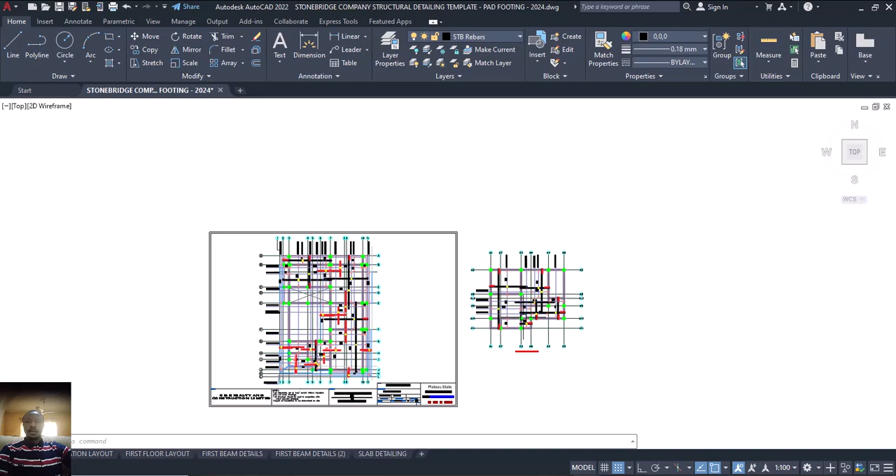If you remember, last time in our part 1, we did a slab detailing for this part, whereby we did the bottom reinforcement, as you can see here. Last time we were able to complete the bottom reinforcement for this. So this time around, we want to look at the top reinforcement for this particular slab.

Don't forget, what we are dealing with is this structure. We are on this level. And since they are typical, it means that whatever we are able to achieve at this point is the same thing that we can also use at this point, since they are the same. They are typical.

So the software we used last time is called Stonebridge Detailing Template. This is the software that is advisable that as a structural engineer you should be using. Now, if you look at this place, we explained it last time. In case you have not watched how we came about this, you should go and watch part 1 of this.

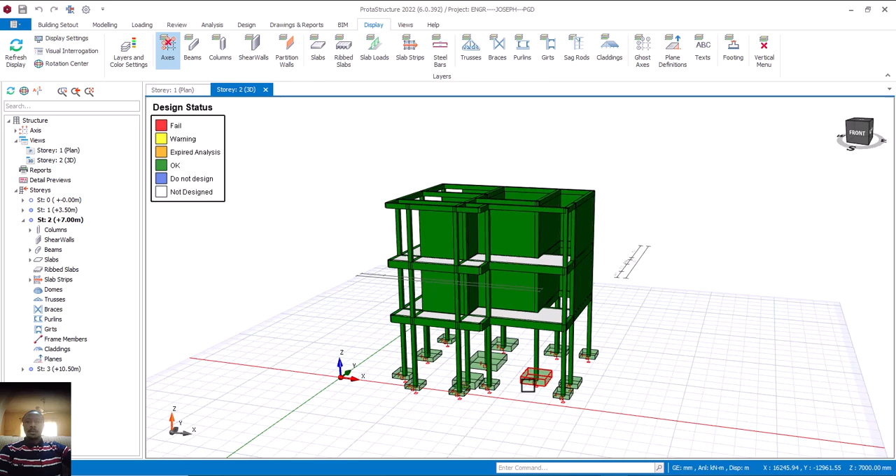So now, how do you know which one to click? Which one to click here depends on the kind of foundation you use for your structure. And looking at this structure, you can see that it's on pad, isn't it? So let's go straight to the point. Once you get to this place, what you need to do is click on pad, since your structure is on pad. Once you click on pad, it brings up this for you.

And we are going to be using this as our example. The example given to us here is what we have used. You can see some samples, the work done up here. It was this one that was used to detail this structure here, as you can see. All right, so let's now proceed to today's training, which is the top reinforcement for this.

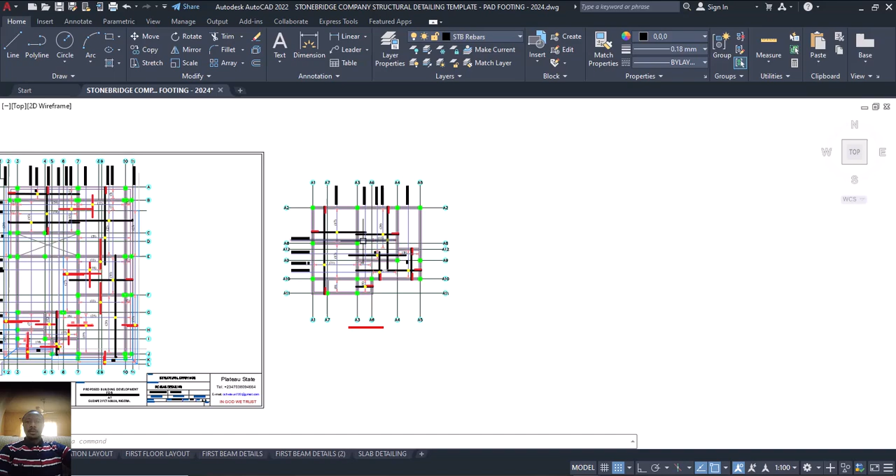All right, so let's proceed to today's training. Once you get to this place, you can see we already have the sample that we are following here. So how do you go about the top reinforcement? That's T1. We already have our B1, B2 here. We also need our T1 and T2.

So for you to proceed to that, if you look at this place, we need our top reinforcement here. In this place, there's no need of top reinforcement. Why? Because there's a staircase here. I already have our return bar, which is the top reinforcement for this particular place. But in this place, there's no top reinforcement. So how do you go about this place?

Now, for this particular beam here, as you can see, I'll pick my dimension. I'll pick from this point here to this point here. Let me bring it down for clarity, and also from this same point here to this point here.

Okay, and put it here, because this particular beam in consideration along this line, you can see this beam ran from here up to this place, isn't it? Now this particular beam is in between two panels, the left hand panel and right hand panel. That's why we need these two dimensions, in the sense that we want to know the extent at which the top reinforcement is going to enter this slab, and also the extent at which the reinforcement is going to enter into this slab based on the dimension. Is that okay?

So I will now bring up my calculator. Let's start from this other side. Based on the dimension, this particular panel is a little bigger than this other side. So 4,349 multiplied by 25%. But I always love to use 30%. You can use 25%, 0.25, but I always use 0.3. So I'll multiply by 0.3, which equals 1,304, approximately 1310.

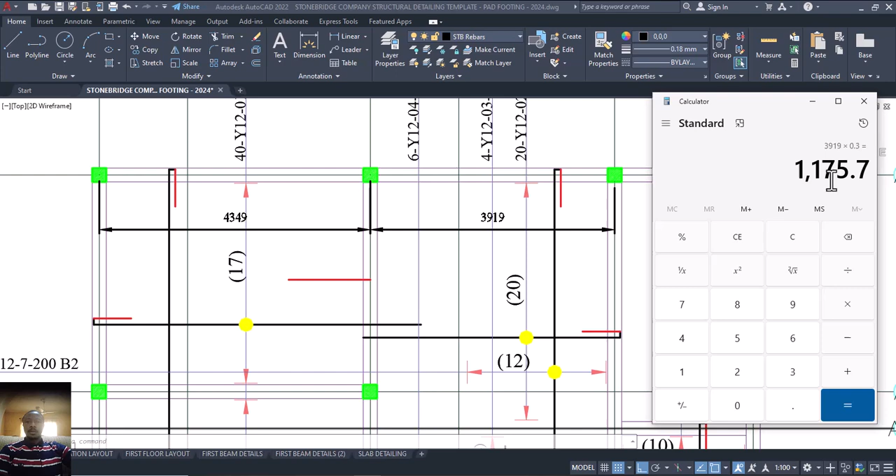3919 multiplied by 0.3, which equals 1175, approximately 1200. I'll pick my dimension L, enter. So it goes from this same center into this place, 1200. Can you see it now? Which then means that this one becomes our T1. And how is this T1 going to run?

If you look at this shape here, the dimension we pick is from here to this place, and it's stopping here, and likewise this other side. So I'll pick my L, enter. It's starting from this point, and I'll take it up like this. Then match the property and put it here. No, sorry, not from here, I'll take it up to this point. Okay, I think it's accurate now.

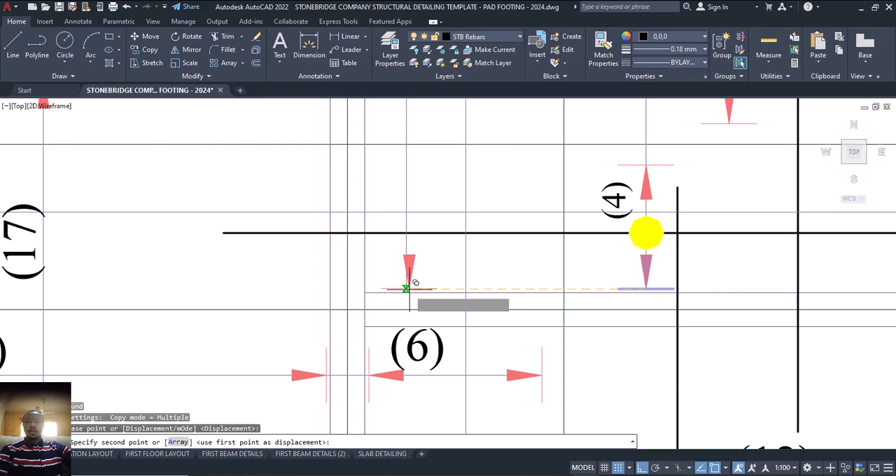So now offset of 25, which is our cover. I'll select this, CP, enter, from this point to this point. It's running from here up to this place. So I also take this property, CP, enter, then come to this place. Let me zoom more. Okay, it's this one. I'll put it here. So that is done.

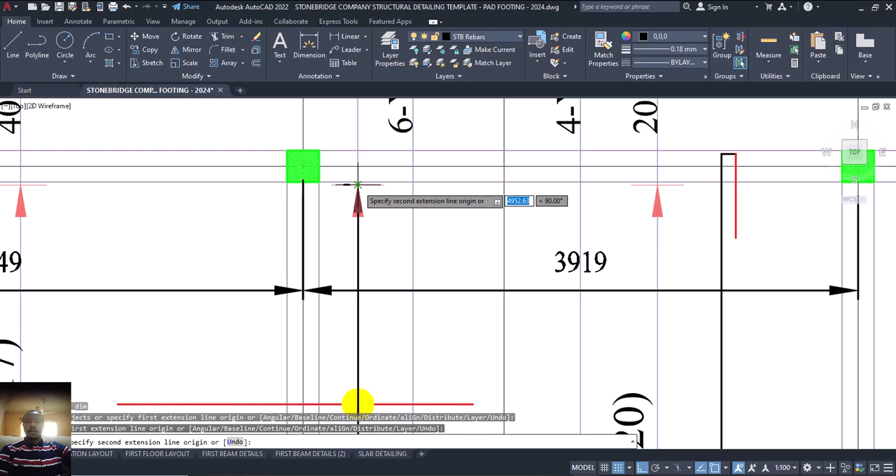I'll take my indicator, CP, enter, from this point to this point here, which indicates that this particular reinforcement is running from this point to this point. So now I'll pick my dimension to know how many reinforcements they are going to cut along this. I'll put my dimension here, and now pick my calculator.

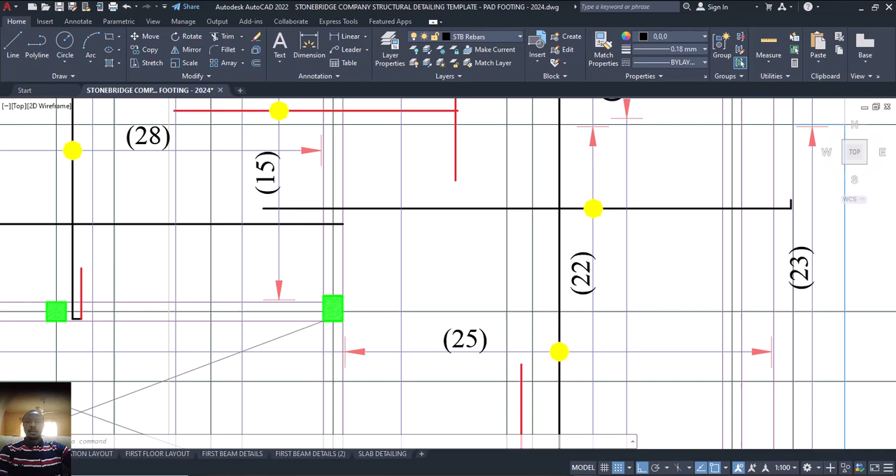4953 divided by 200 spacing, which equals 24, so that's 25. So I'll come to this place now and pick that sample, 25. Let me pick this one, CP, enter, and come to this place now.

25. Where is it? Okay, see it here. Okay, I'll put it here. But our own is 25, not 15. So I'll change it, double click on it to change it to what? To 25. Is that okay? That is that. Then this dimension now, I can now delete this dimension.

Okay, and this other dimension here. Let me leave the dimension because I'm not done yet. I can delete this other side, I guess so. Okay, that's fine. Now I haven't explained that, but don't forget that this particular one we said is running from this point to this point, isn't it? First of all, let me put the dimension 1310.

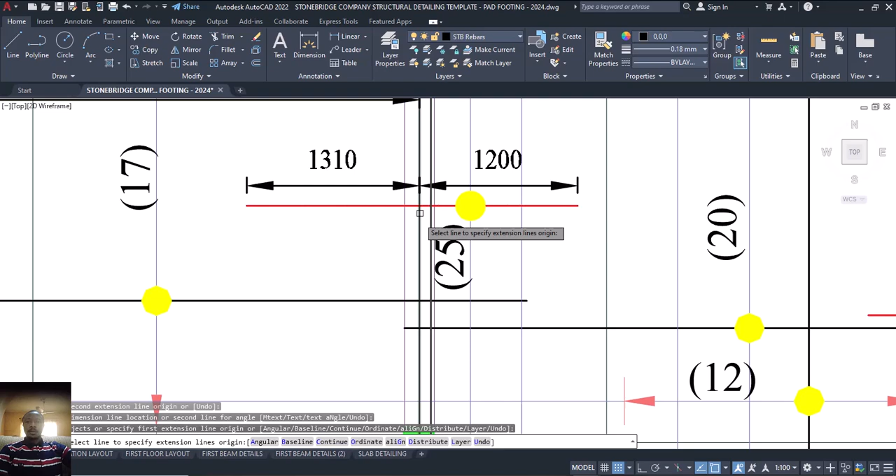Because the engineers at site, some of them are not structurally inclined. Understand? They can handle a project, but they are not structurally inclined, because if you do not put dimension, they will not know the extent at which this reinforcement is going to enter here. But with the help of this dimension, they can now know that this top reinforcement that is running from this point to this point, the length into this place is this. Can you see it now?

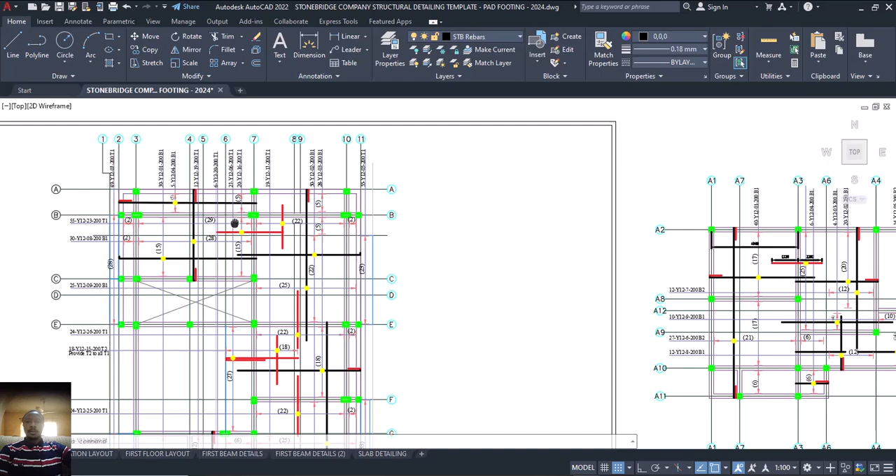So I'll now match the property with this. Okay, we don't have that one here. Okay, see it here. Click on that value there, and then come to this place and change it to this. Correct, perfect. We are done with that. So now, this 25, come to this place, CP, enter. Then this place to this place. Let me undo. Let me delete it. It's not okay. Then CP, enter. From this point to this point.

All right, now how many of them is 25? 25 Y12. So 25 Y12, number coming 1 2 3 4 5 6 7 8 9 10. That's number 11. Then don't forget T1. This is my T1. Click here. That's my T1 now. Is that clear?

Now coming to this other side here. If you look at this place, the space between here and here is more than here and here. So on that ground, I'll pick my dimension from the center of this place to this place here. That's 6. So this other side I don't need to put. Why? Because I already have a sample here.

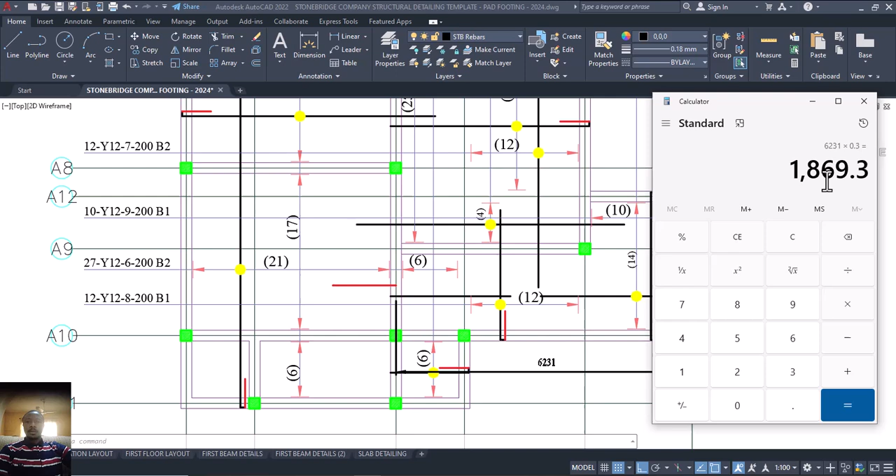I will just pick my reinforcement, L, enter. Then at this point here, in between this place, I'll put my 1310, isn't it? Then enter. Then match this property to this. Let's now calculate the length into this side. I pick my calculator. So it's going to be 6231 multiplied by 0.3 equals 1869. That's 1870. L, enter. Come to this point here, and make it 1870. Enter.

Then come to this place now, match the property. Perfect. Now pick my line. This particular one is running from where? It's running from this point. Let me take it from here. Okay. Come in, let me plug my system. I'm coming.

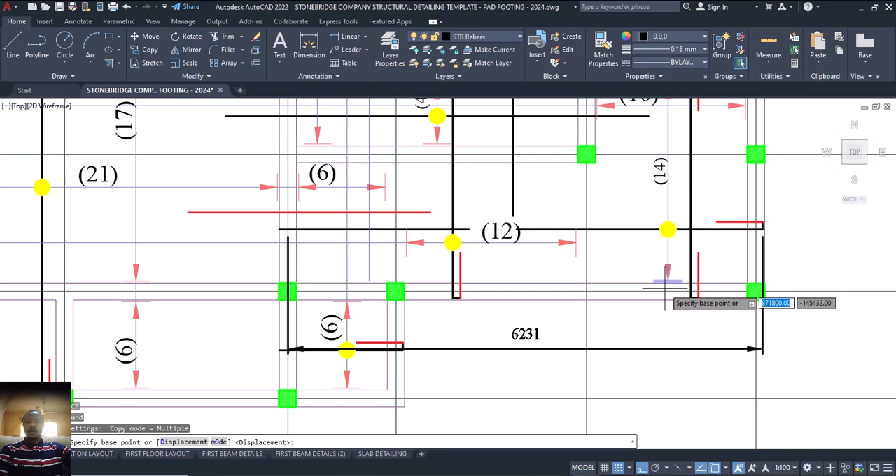Okay, I'll take it up here. Then click on this one to match the property here. Then from this place, let me offset the cover 25. Enter. I'll now take my sample here. CP, enter. From this point here to this particular point here. Then what about from here to this place? I'll pick this sample here also. Then CP, enter. From this point here, I'll come to this side here.

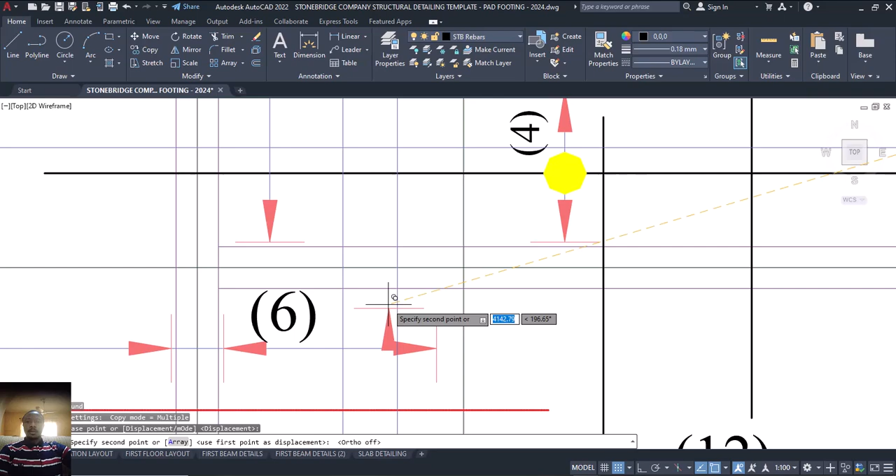Where are we? Okay, we are here. It's running from here to this place, this one here. So now my indicator, CP, enter. From this point, I'll put it here. Am I correct? No, it's on this side. Okay, let me delete this.

Which then means that this particular type of reinforcement is running from this point to this point. Do you see it now? So as this one is running from here and stops here, this one is running from here and stops here. Then what's my dimension now? Pick my dimension.

Okay, from here to this point here. Okay, that's 1553. Then divided by the spacing 200. Okay, this is what? That's 8. Is that okay? That is 8 numbers. You need 8 numbers of that.

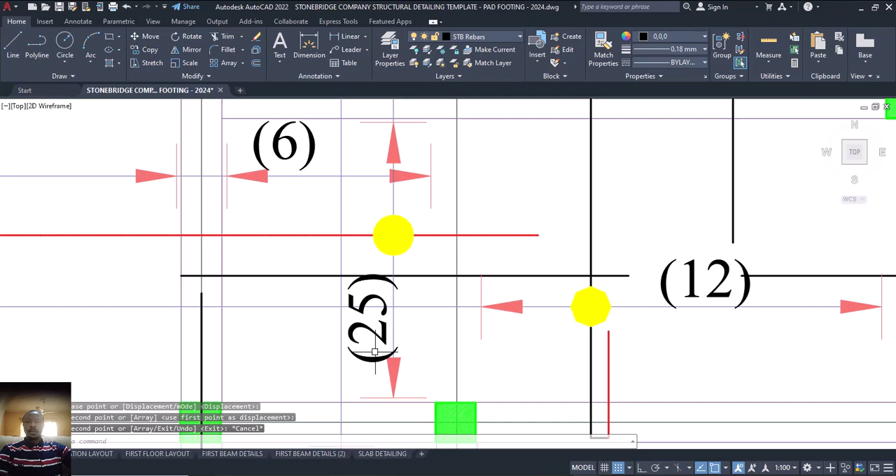CP, enter. Copy this one and come and put it here, and we'll make it turn into 8. Double click on it, then bring it back and make it 8. So that means we need 8 of this. The arrangement is going to be 8. 1, 2, 3, 4, 5, 6, 7, up to 8 for this particular space here. So that's fine.

And also, if you now look at this place, the same thing is going to be done. So I also come to this place, L, enter. Let me remove this dimension first. Now L, enter. I'll come to this place now, from here to this place. You can now see that the distance from here to this place is different, in between here and here and here and here, isn't it? So on that ground, I'll pick my dimension.

Let me start from this edge here, let me put it here, let me bring it down. Then from this point here to this point here, let me bring it down. Also from this point here to this point here, let me bring it down. Correct. Now, the distance from this one and this particular vertical beam is in between this space and this place, isn't it?

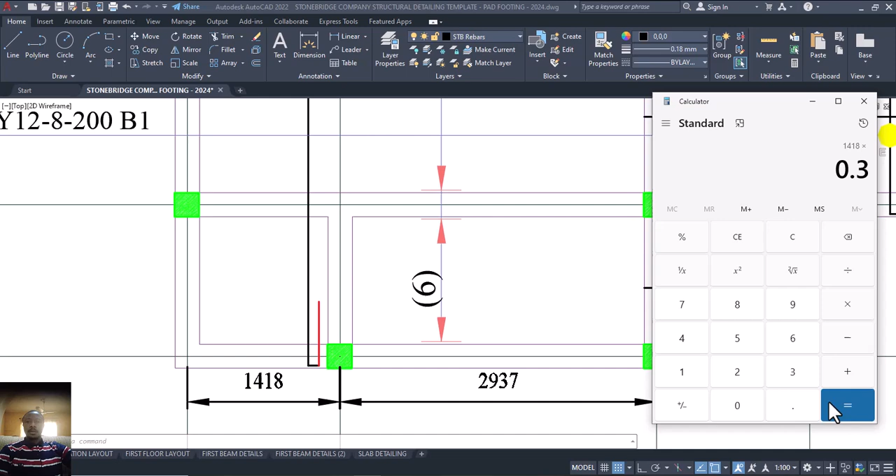So I'll now pick my calculator. 1418 multiplied by 0.3 equals 425. That's approximately 450. So I'll now come to this place, L, enter. From this point here, like this, 450. Enter. Then match the property of this, like that. Then come to this one also.

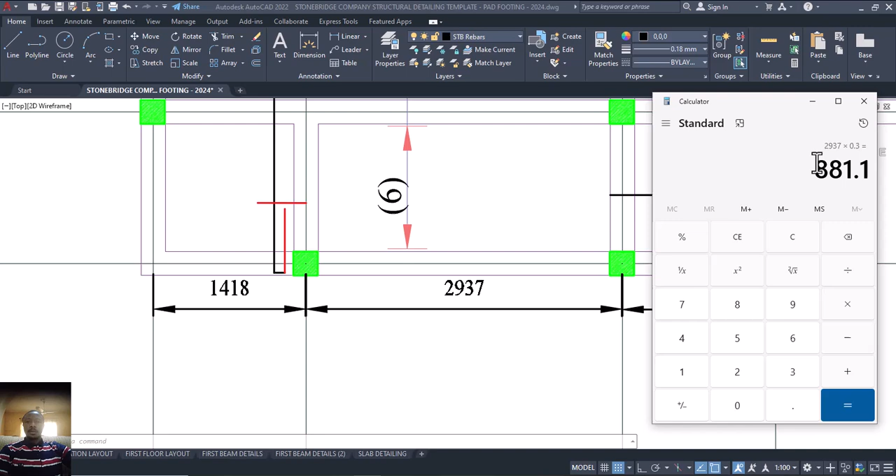Let me pick my calculator. 2937 multiplied by 0.3 equals 881. So that's 885. L, enter, 885. It's easier to get than 881.

Okay, I'll now come to this place, click on this, then click on this, and match the properties. This one I can adjust. Enter, take it up. Can you see it now? Now we said this one is 881. Sorry, 885. I'll come to this particular place, then to this other side too. It's going to be the same thing, 885. Enter. Match this property.

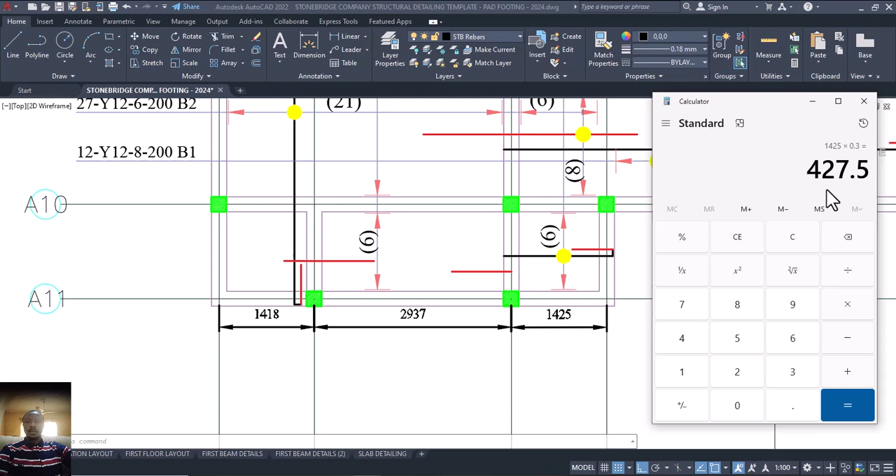Then let's now calculate for this side into this side. I'll pick my calculator also. 1425, then multiply by 0.3. That's 450. So I'll now come to this place. Enter. From this point here into this place is 450. Enter. So now select this one, and match the property with this.

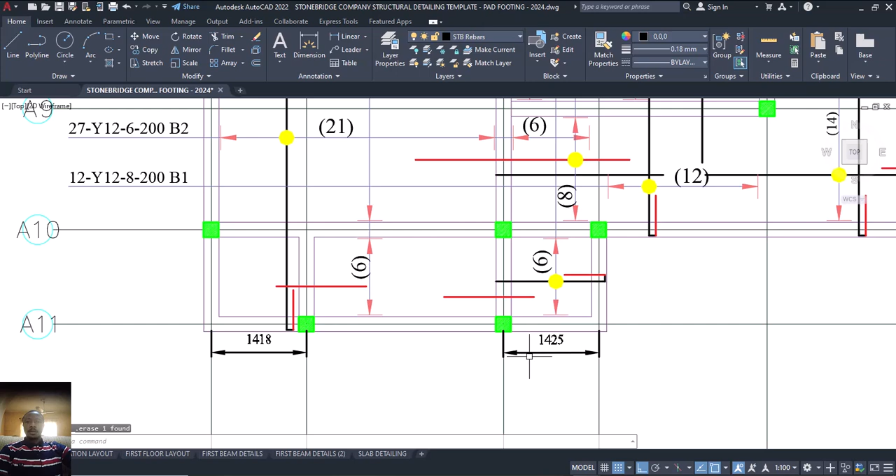Perfect. So I can now delete these dimensions. Now I'll put the dimension here, so the engineer at site is able to understand. Then from this point here to this point here, they are clashing, right? That's not a problem. Oh, sorry. Undo. Let me take it again. From this point to this point, let me put it here, and also from this point to this point, let me put it also here.

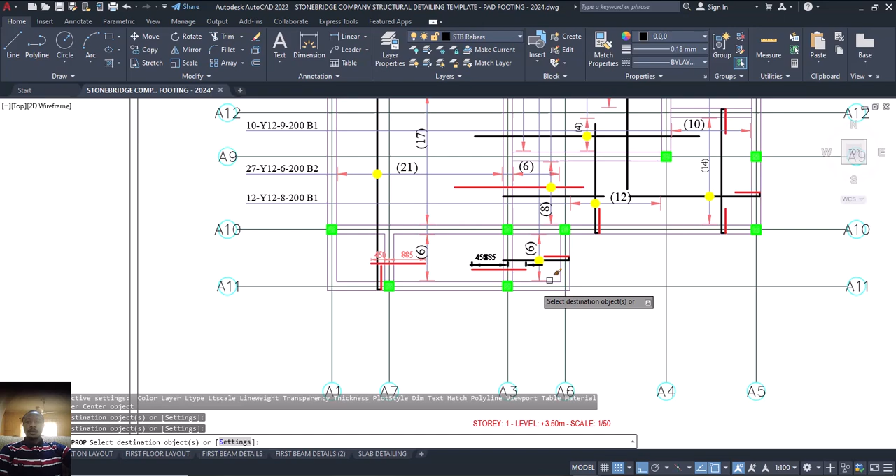Do the same thing here also. From this point to this point, bring it up here, and also from this edge here to this point here, take it up here, let them meet. Now I can pick this one, then match the property, come to this place, select this, select this, select this. You can see they have taken their positions, isn't it?

So that is fine. Now for this one, let's come to this place, select this one like this. From here I'll take it up. I want to detail it out. I want to call out the bar. So I'll click on this one here, and also this one, match the property. This one is going to run from where to where, but first let me take this one up by 25, which is the cover. And also I can just copy this one like this, since they are in the same place, then CP, enter.

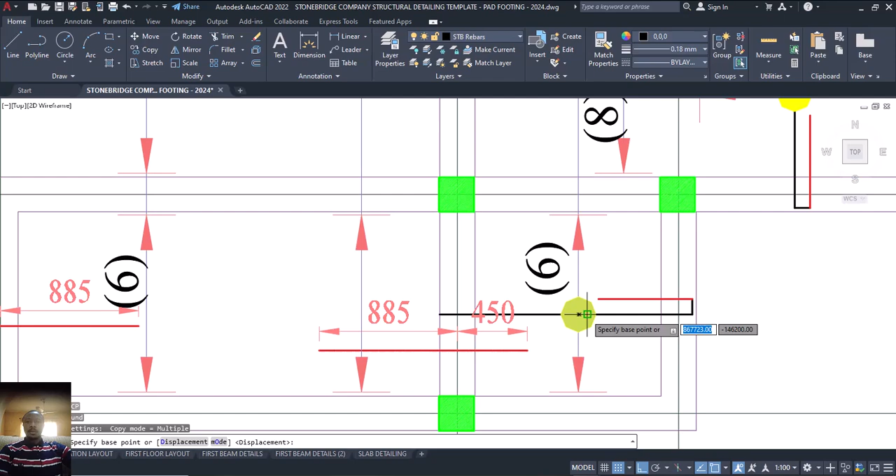So you have to look for a way of making the work fast for yourself. So I'll come to this place now. Okay, can you see perfectly? So I can now click on this to select this one, CP, that's my indicator now, come to this place and put it here. Can you see it now? So that is that. Let me see if I can move this one up. Enter. Is that okay? Let me take it up a little. Okay, all right, that's fine.

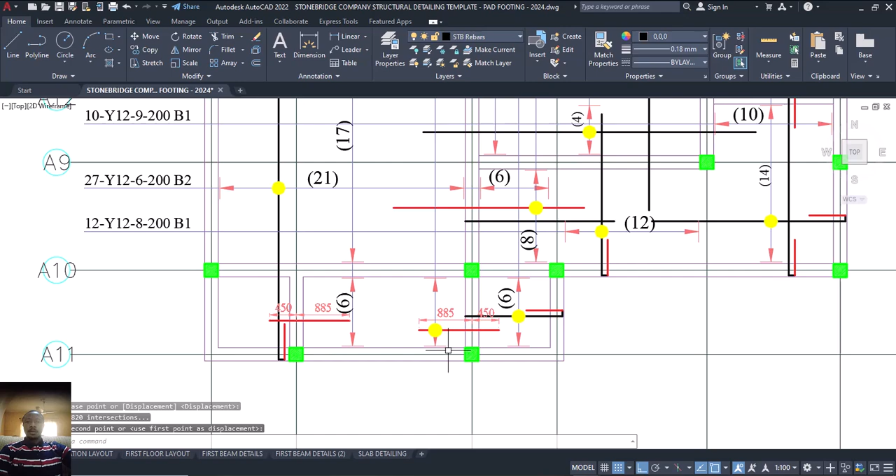Sorry, this one has to come down. Enter to the indicator. All right, now what's the dimension from here? How many of the reinforcement is going to be the same thing? Because if you look at this step here, this bottom here, they're having the same kind of number and width and length. Is that okay? I'll now press CP, enter. You come to this place, it says 6. Can you see now? I'll just put it, I don't need to calculate this one anymore.

So I'll now come to this place, go up now, and come to this place now, CP, enter, copy it. Now from this point to this point, then how many of it? We said it was 6. So I'll put 6, Y12, number what? Number 11, this time around number 12. Is that okay? Then T, T1. Okay, we are done with that.

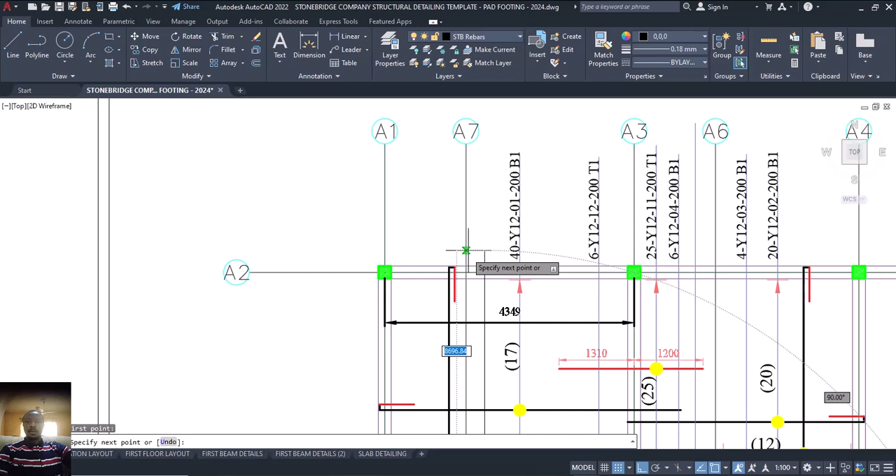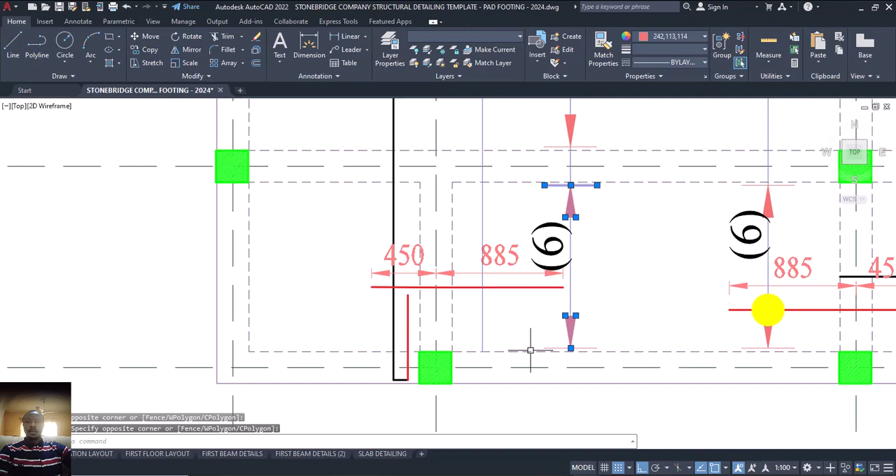I'll also come to this place now, enter. I want to call this one out again from here like this. Okay, take it up. Then match the property of this. This is my call out line. Then come to this place now. Sorry. Okay, so I can now select this one like this, and this one, and also this one. Then CP, enter. Then from this point here to this point here. Okay, that is that.

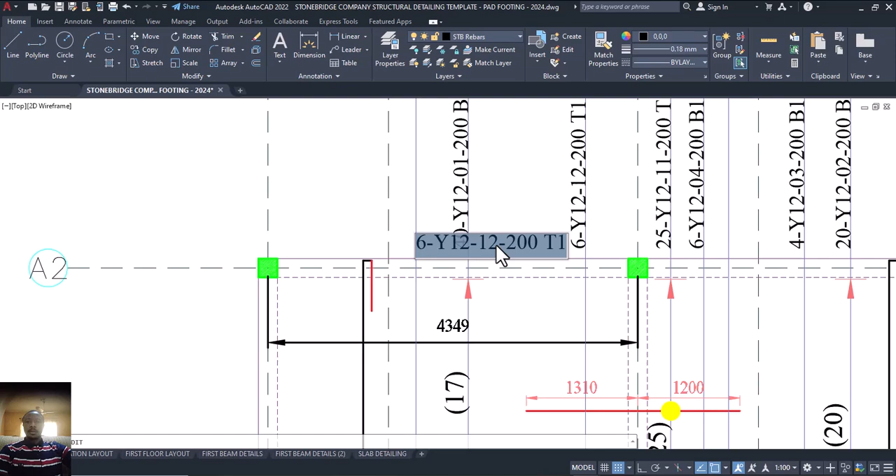I'll come to this place now and also take this. Where is that? Okay, let me just use this one. CP, enter. From this point now, I'll bring it to this particular place. Okay, still 6. But the number, I'll change the number to what? Number 12. That's that. Okay, so for vertical now, we are done with the vertical. This one here, which other one? Okay, this one's already here. We are done with this, done with this, done with this. So now remain horizontal. So let's now go for horizontal.

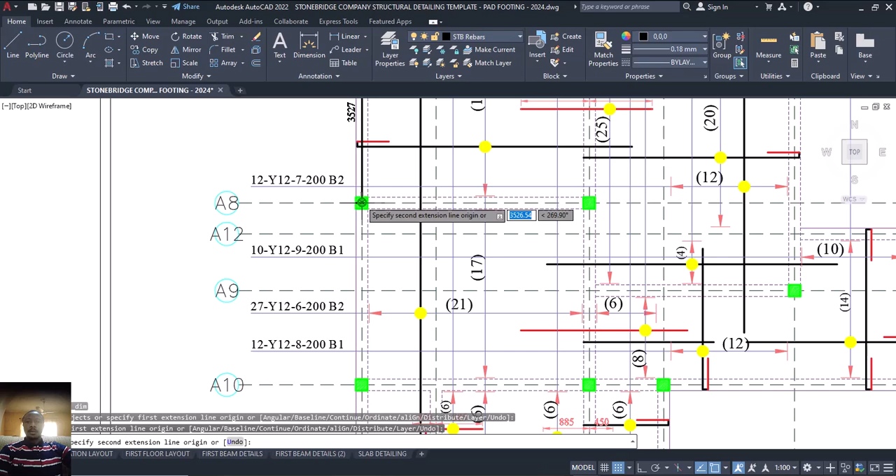Now for the horizontal aspect, we are now going to pick our dimension. Where is it? Okay, see it here. Now take from this point to this particular beam here, then bring it out. Don't forget that this beam that we are considering is in between the upper panel and the lower panel, isn't it? So we need dimension for the upper panel and the lower panel. So I'll now come to this place, continue with the dimension. Then from this one to the lower panel, which is this one.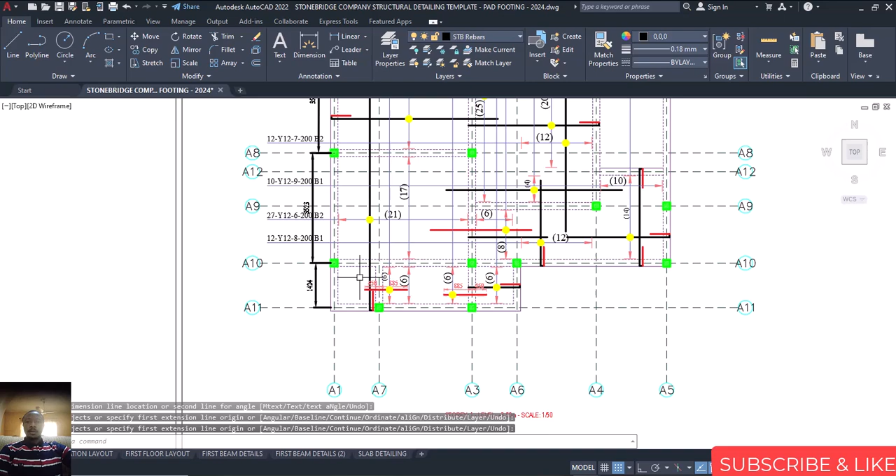I also put the dimension here. Definitely we are going to put this one here, because it's also in between two panels, isn't it? So I'll also continue with the dimension here. If you like, I can do it one after the other, but for me, let's just put it here like this. All right, that's fine. So now let's pick our calculator to start calculating. Okay, here we have 4,000. Yes, we have 3,527.

3,525. So 3,527, then multiply by 0.3, which is equal to what? 1,058. That's 1,100. So I'll now pick my reinforcement, L, enter. So it's going to be from here like this, 1,100. Enter. Pick this one, then match the property.

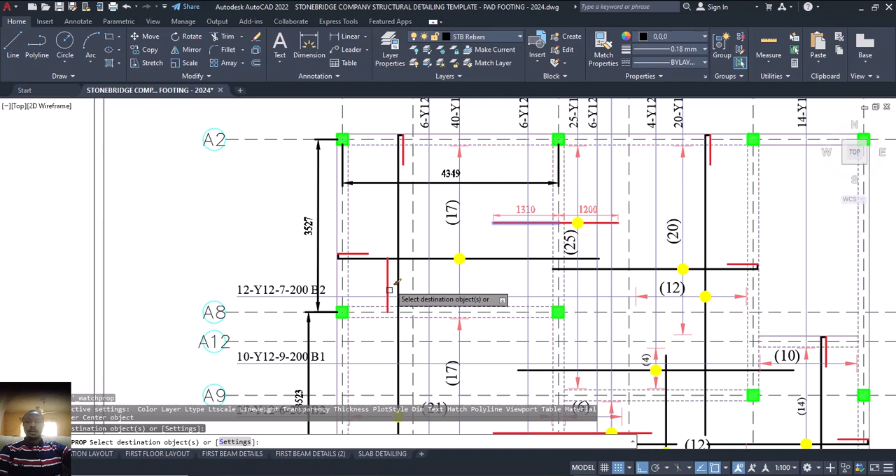Now come to this place also. Let's calculate for this other side. So let me delete this one to avoid confusion. Come to this place now. Where's my calculator? Okay, we have 3,523, then multiply by 0.3, which is equal to the same thing, 1,100. So L, enter, which is my reinforcement from this point to this particular point.

Sorry, where is the point? It says 1,100. Enter. Excuse me, sorry. Let me take it again. L, enter, from this point here. Okay, down 1,100. Enter. Then select this, match the property to this.

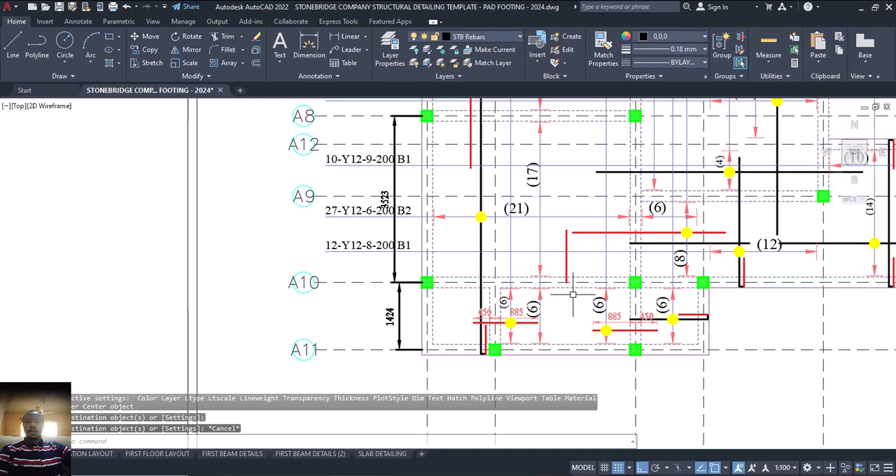So now looking at this one, I also come to this place, L, enter. This is the same, this one here. If I like, I'll put it here, but let me just put it here so that it's not direct. So I'll now come to 1,100, enter. Match this property to this particular one here. Okay, that is fine. I'll come to this place also, pick this one here.

1,424 multiply by 0.3 equals this. There's a 450 also. I'll press my reinforcement L, enter. I'll come to this place also, 450. I'll put my 450, enter. Then click on this and also match the property with this. So I can now delete my dimensions.

So therefore let's now start calling it out. I'll pick my line, my call out line. Let me just use my MA on this one here. So match the property of this call out line. This offset, my offset, which is 25. Enter. Pick a sample. So I have the sample here.

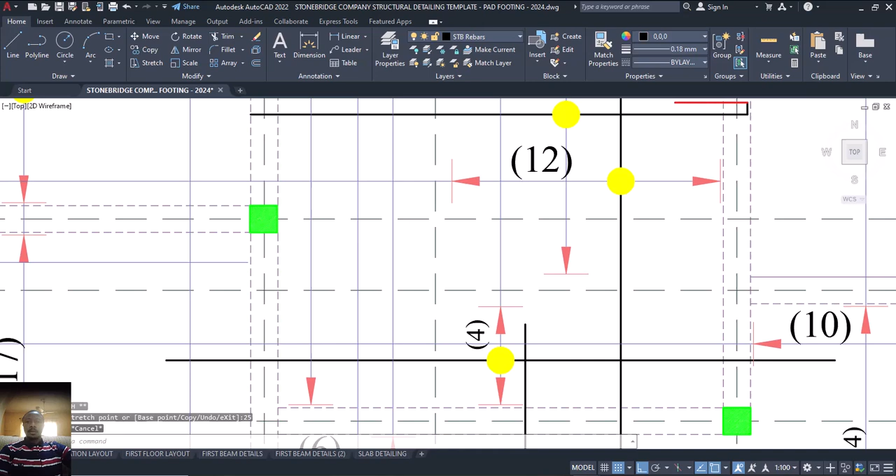CP, enter. Then from this point here to this, where are we? Okay, we are here. To this point here. Then what about this other side also? I'll pick from this point here. I can pick this one, CP, enter. From this point here, I'll bring it to this point here. Then select it and offset it, M, enter, by 25, enter. Can you see? All right, so I'll now put my indicator, CP, enter.

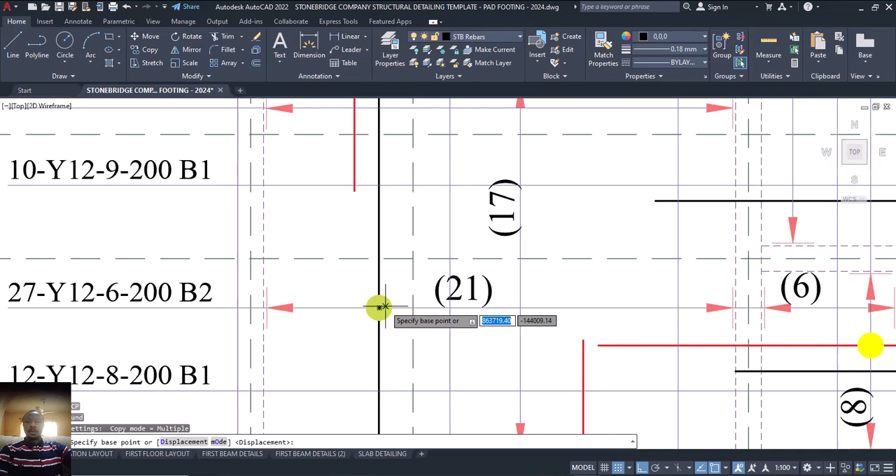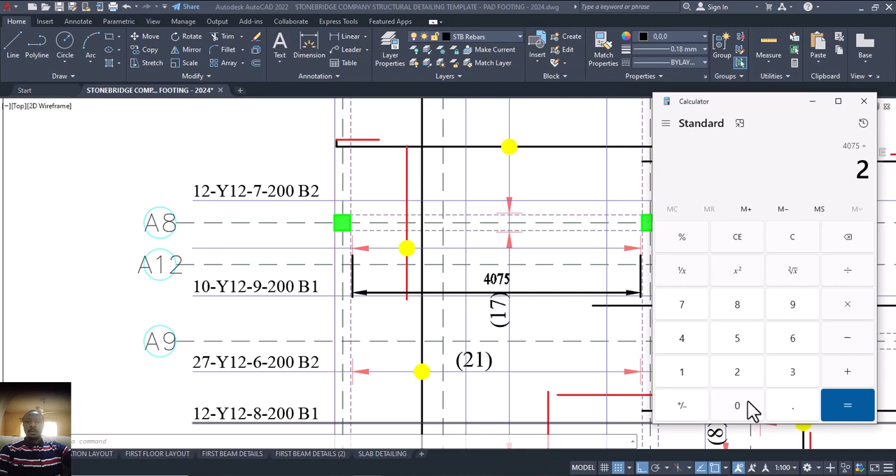From this point here, I'll put it on this other side, sorry. Now how many of these reinforcements are going to go from here to this place? Now I'll pick my dimension from this point here to this point here. That's 4,075, then divided by the spacing 200. That's approximately 21, because it's supposed to be plus 1, so that's 21.

I'll come to this place now, CP, enter, then come to this edge here and put it here. Then double click, and we say it's 21 Y12, number 14, then that's my T1, CT1. Because it's running irrespective of direction, either X or Y, it's still my T1. We are going to see the T2. I'm going to show you the T2 now. Let's finish with the T1 first.

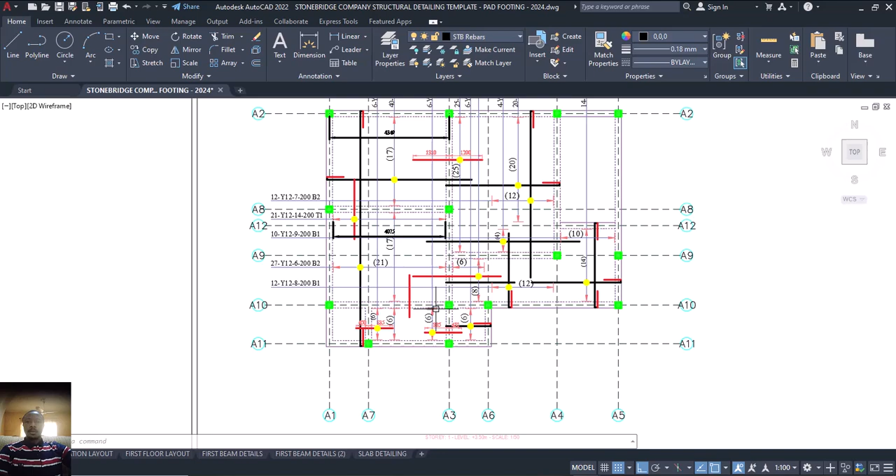That one has been called out, so I'll now come to this place again. Coming to this place now, where is it running from? From here like this. This particular space. Let me see. Now, if you look at this, let me give you another thing. What we are having here is actually as a result of from this point here to this point here, isn't it?

But if you now get to this place here and this other place, it's the same thing, which means this one is okay. Now, if you get to this place, you discover the distance from here to this place is different from the distance from here to this place. If you like, you can detail it. That's how you can detail it out.

But if you don't want, you can leave it like this and just call it out. Which then means that, don't forget, we are going to do this place. You see how to do this place? Can you see it now? We have to do this place. Is that okay? So this place now is going to run from here. L, enter. It's going to be from here, from this point. Let me use this. It's still okay. Let me just use this.

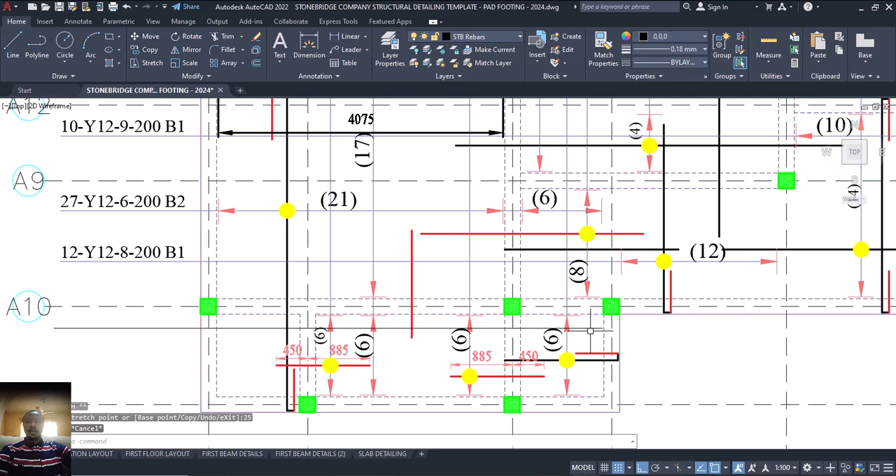When they get to site, they find a way around. They will do the same thing. Even though it's now overlapping at the top, to complete top, there's no problem. It's still okay. If they have a complete stop, it's still okay. Okay, then take this one out by 25. Okay, by 25. Then match the property of the color of my outline.

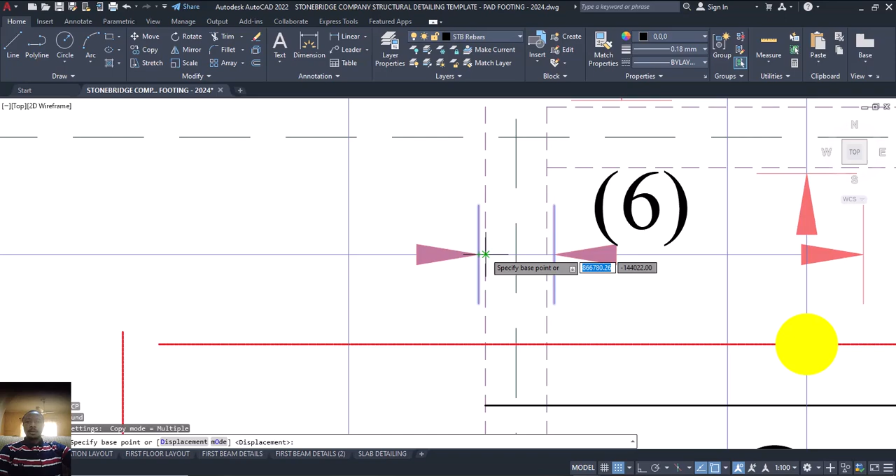Okay, then select this. Which one should I use? Okay, let me use this one here. CP, enter. From this point, I come to this point here and click. Okay, then this place also, I'll come to this place now, choose this one, CP, enter. Okay, then come to this other side here, sorry, come to this place now and bring it down to this place. Is that okay? That's fine.

And also to this place, we also have it here. Perfect, that's okay. So this one now, I can now try to bring it down, enter. Is that okay? You can make adjustments. Okay, that's fine. All right, so now let's take this. Let's pick this sample here, this number. Then from here, I'll bring it down to this place. This one here. Since it's a small plan, I can reduce it. I can reduce the scale of this.

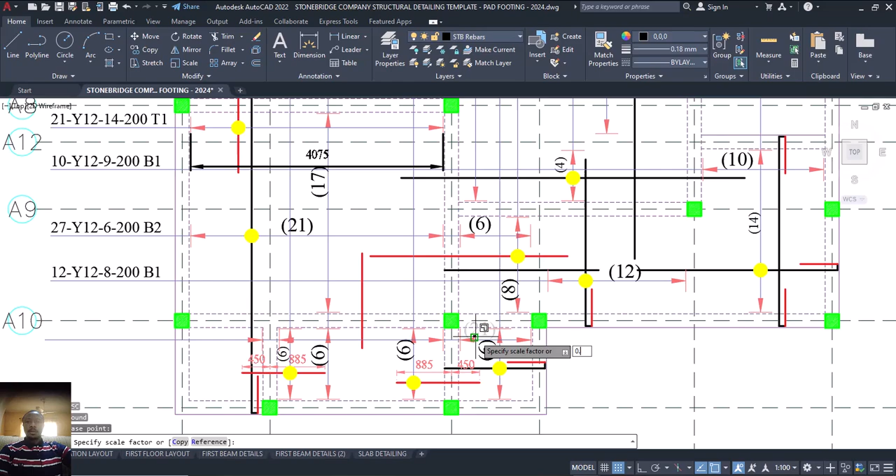Come to this place, then 0. Let me use 5. Okay, it's okay. Let me see. Yeah, it's okay. In fact, based on the size of this drawing, I can use this actually. I can just copy, click on it, and then it's the same thing. Okay, can you see it now? To reduce it, let me remove this one out. Let me move this one out. Sorry.

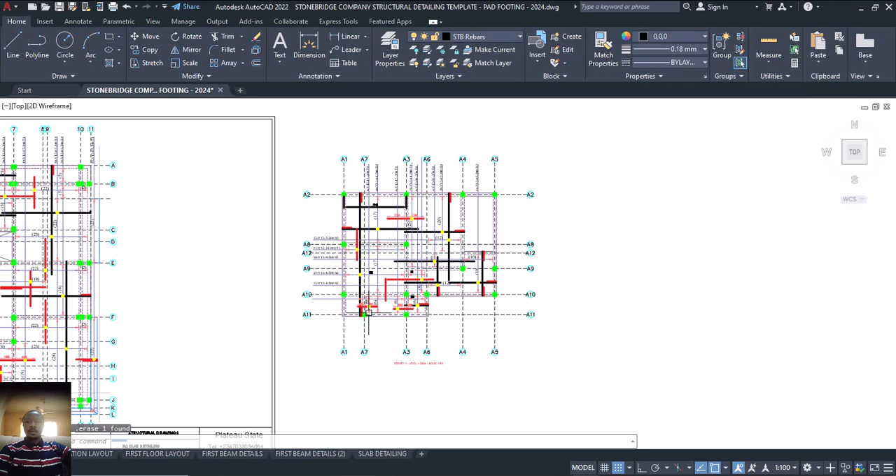Enter. Okay, but if it's a big drawing, definitely I have to leave it like this, as big as they are, so that you're able to show very well. Is that okay? That is fine. So let me remove this dimension. Okay, let's proceed. Now we have 21. This is not 21. I just want to copy it. CP. Then to this place also, and also this one here.

So this one here, I need something like this. Sorry, I need this one here. This particular one. Let me deselect this. Okay, and select this. Then CP, enter. Then from this point here, put it here. Correct. Okay, let's now work on the dimension. Let me pick my calculator. Let me put dimension first.

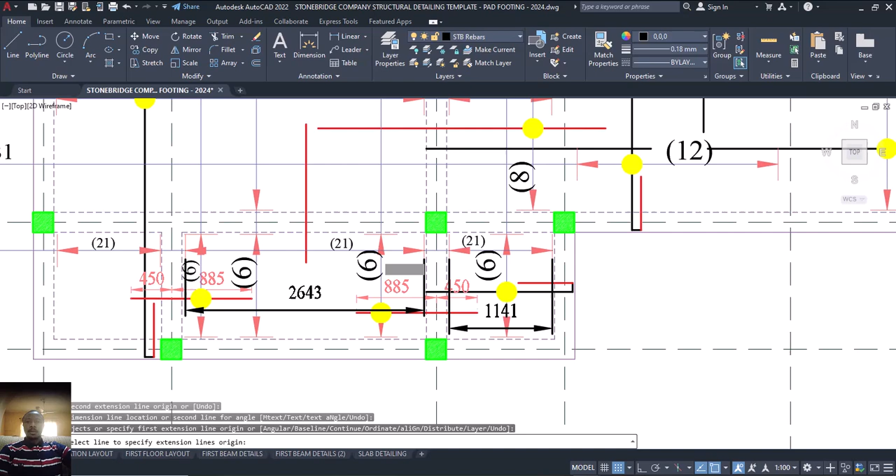Now from this point to this point is what? From this point to this point we are having this, and also from this point to this point here we are having this, and from this point here to this point here we are having this. Okay, that's fine. So I'll now pick my calculator. Then what are we having?

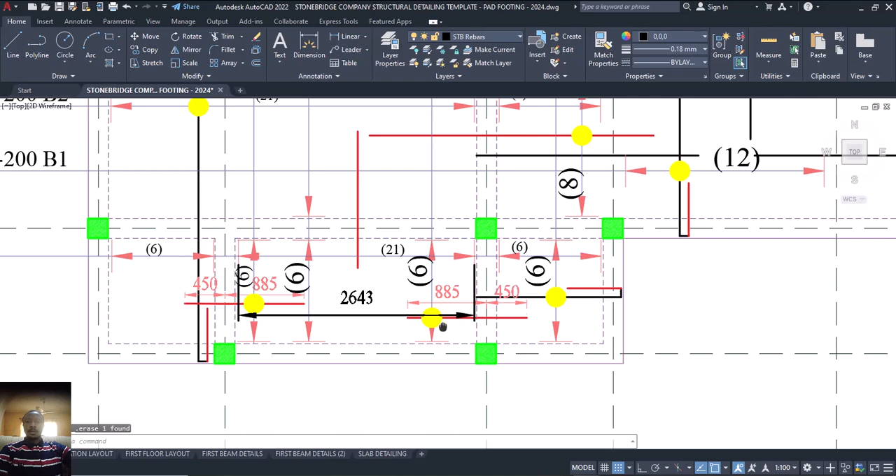1141 divided by 200 spacing. That's 6. Automatically 6. Where is that? 21. Okay, see it here. 21, I'll make it 6. Also, since the dimension here is the same as this one, I'll quickly come here again and turn it to 6. That is fine. Then remains this place here. So I can now click on this. Remove this dimension. Click on this. Remove this dimension. Okay, which one is this? Okay, this dimension. I'll come to this place now.

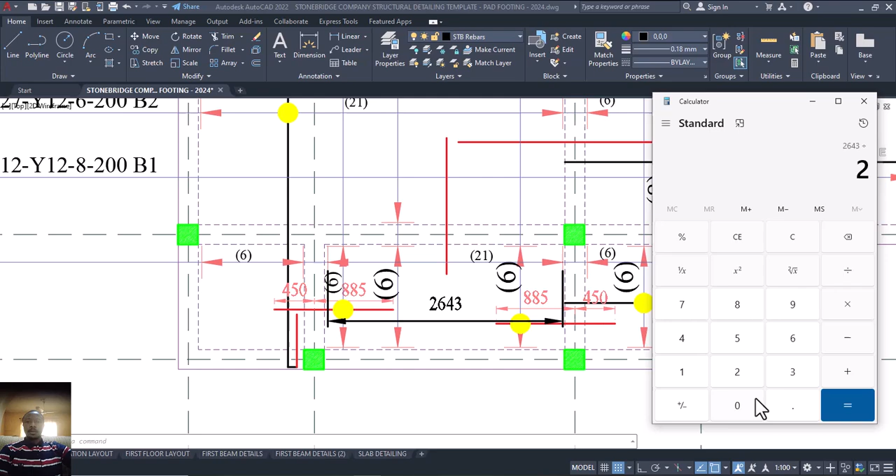2643 divided by 200 spacing. That's what? Sorry, no. I'm coming. Let me see. 2643, am I correct? Divided by 200. Okay, 13, plus 1, that's 14. So I can now come to this place and make it 14. Okay, 14, and then delete this dimension. Okay, now what is that total call out now? Let me scale this one down. 0.5.

Okay, let me now click on this, all these ones, this one, okay, no, this one, this one, this one. Okay, perfect. So you can now see it. Can you see it now? So you can now do something like this. It's very okay. You can see how the thing came out very, very well.

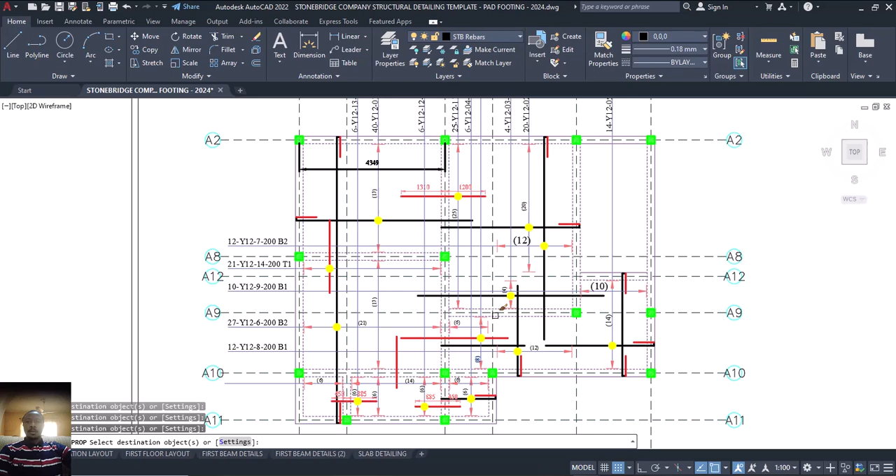So that is that. Okay, for this one here, let me match the property to this. Okay, that's good. Very good. So you can now do the same thing to all other ones. Is that okay? Or maybe before we finish, I will do that. Or let me just do it now. Which one am I clicking on? Okay, it's on this. Another one again. Okay, this one, and this one, and this one. Which one again? Okay, I think that's all for that.

So for this, for horizontal, this one, which other one again for horizontal? Okay, I think that's all for horizontal. So this is vertical. Let me see where is vertical. Okay, come to this one. 14. I think that's all. Is that okay? Perfect. So let me delete this dimension. Okay, very good. Can you see it now? Oh, sorry. Okay, so now it has come back. What's wrong? Okay. So as you can see now.

All right. So now let's call out this. Where is that top? Okay, let's take this sample of top. CP. Enter. And from this point, bring it down to this place here. Then how many of them? 6 plus 6, that's 12. Plus this, that's 26. Yes, this plus this 12, then plus 14, that's 26.

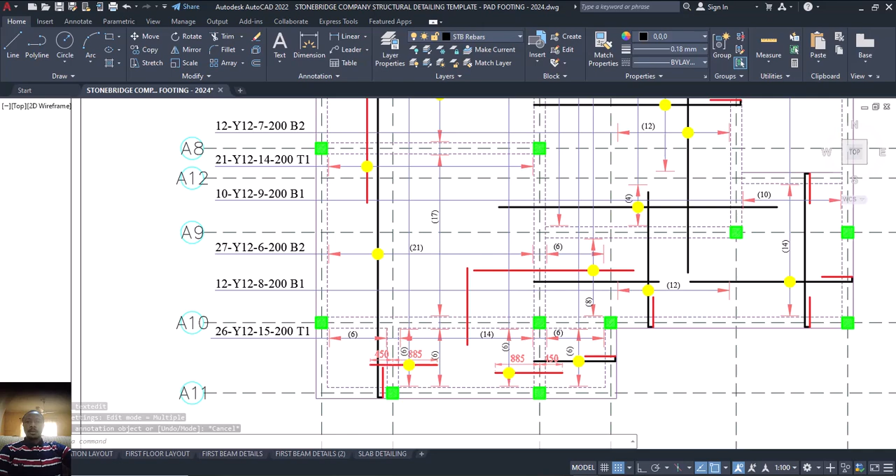CP. Enter. So from this point, we are referring to this. That is that. So come to this place now. I have to pick my dimension also, my dimension from this point. This is the second to the last stage. Then from this point to this point, and also from this point to this point here, and put it here. So now, do I have top for this one? Okay, yes, it's here. Looking at this one now, this particular dimension 1825.

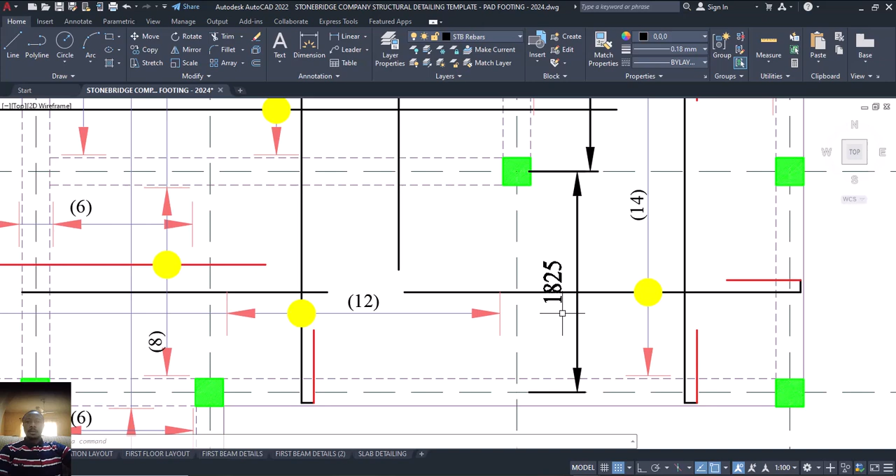Pick my calculator. 1825, then multiply by 0.3 equals what? 550. So I'll press L, enter. I'll pick it to this, put it here, bring it down by 550, then enter. Change the color to show that it's top reinforcement. Click on this. That's fine. Then delete this. Then what about this place here?

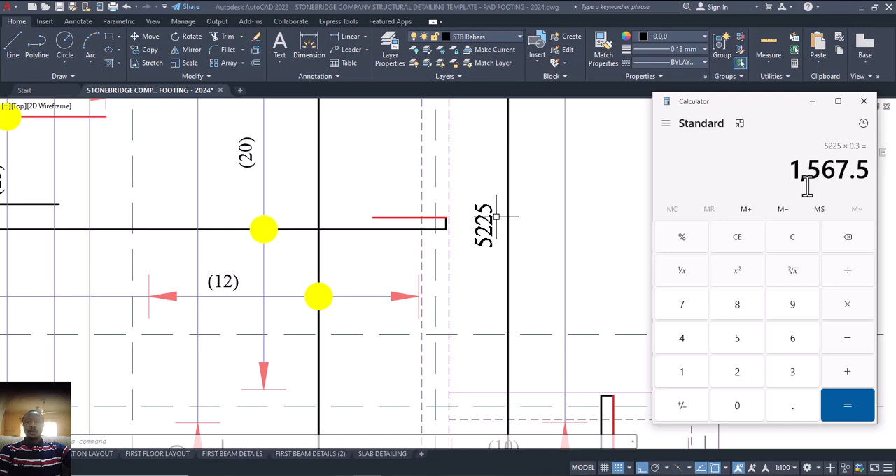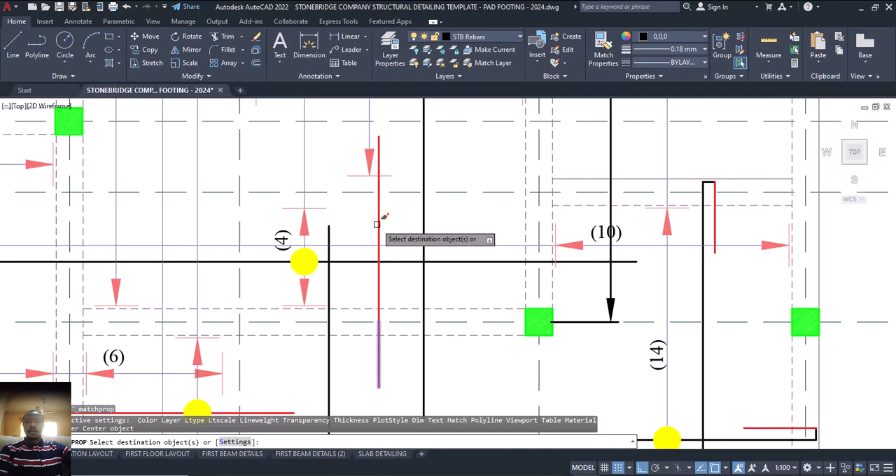Now take my calculator again. 5225, which is this one. 5225, then multiply by 0.3, which is equal to 1570. Is that okay? 1570. L, enter. 1570, enter. Then this, and this. That's fine.

So I'll now bring out my indicator here. Sorry, not indicator, call out line. From this point here, I'll bring it here. Now it's expected that the edge should be the same. If you watch our part 1, you see how we trim the excess out. So that's that. Click on this, then come to this place now and click on this to match the property, and then our call out this one here. Take it out by 25. That's the cover. Enter.

Then pick this. Then CP. Enter. Then zoom it small. Come here. Pick it. Then where is it? Okay, we are talking about this place here. Sorry, undo it. Okay, let's be there properly, correct. And it's running from where to where now? This particular one is running from here to this point here. So I'll pick this one here, like this.

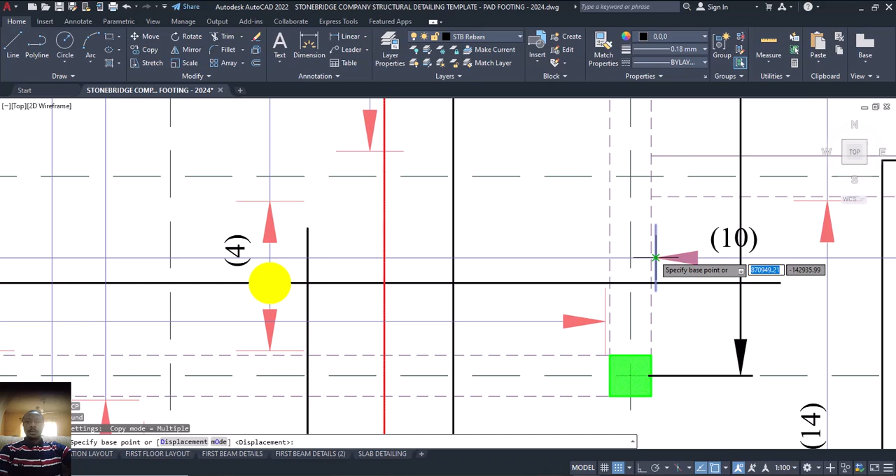CP, enter, then come to this point here, and also come to this. Where is it? I think it's here. Correct. Yes, it's there. Okay, so let's see. Are we correct? Yes, it's there. So now our call out, our indicator here, CP, enter, and come to this place here. We are referring to this one here.

Okay, now what's our dimension? I'll pick my dimension from this point to this point here. So that's 3,644. Pick my calculator.

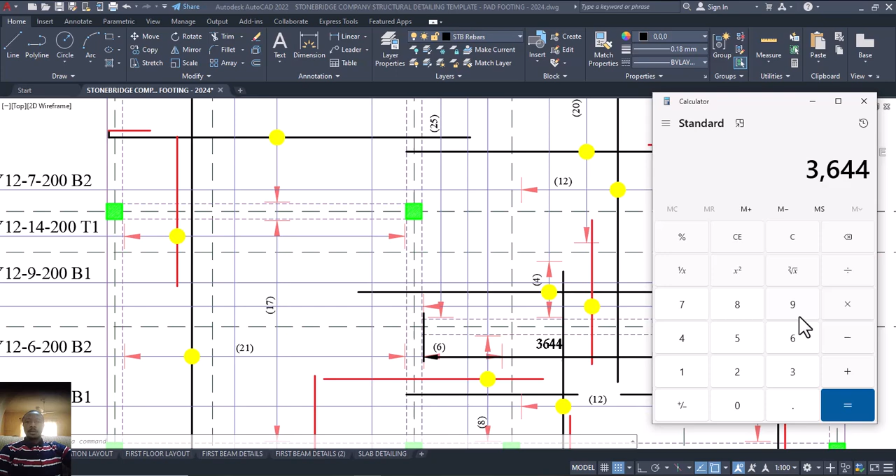3,644. 3,644, then divided by 200 spacing, which equals what? 18, plus 1, that's 19. So 18. Put 18 is good. Plus 1 is good. Is that okay? So let me adjust this one. We said 18. Let me adjust this one.

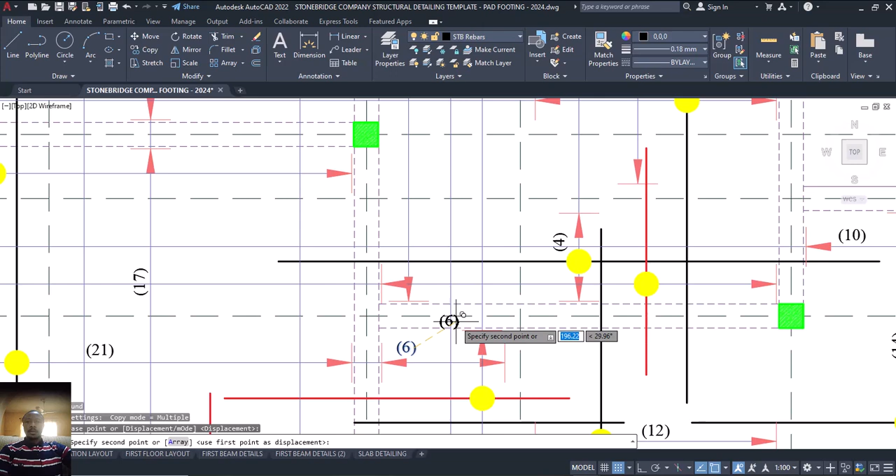Or is it okay? Okay, the dimension. Let me remove it. Okay, it's 18. So where's my text? Click on this one, CP, enter, then come to this place and choose what? 18, and turn it to 18. Okay, then double click on it. Is that okay? I make it 18. 18 or 19? Let me see calculator. 18, yes, plus 1, that's 19. It's okay.

Okay, I'll now come to this place. Let me adjust this one from here. Enter, then from here take it up here. Correct. Okay, come to this place. Where is my T? Okay, CP, enter, then come to this place and bring it down to this place. Okay, then click on it. It says what? 19. Am I correct?

19 Y12, number what? 16. I think we have 15 down. Yes, we have 15. So number 16. Is that okay? And click outside. Correct. So now, looking at this, we are done with all the top reinforcement. That's T1. Now, the T2. What's the meaning of T2?

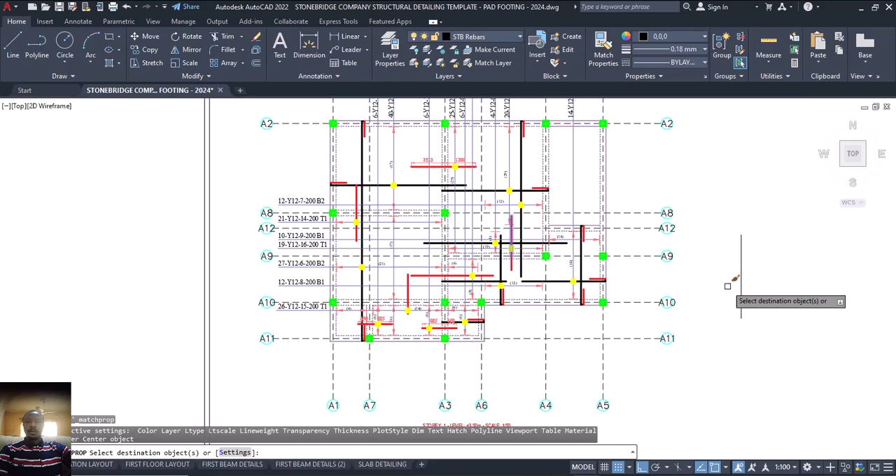If this T1 is the main bar, then we need a T2 that will also run. Okay, let me show you something. Let me pick this line. I want to cite an example here. Can you see? It says from here to this point. Let's say we have this line. This is my primary, this one here. So it then means this one is our T1, isn't it?

Let's say this is a wall. Let me just set an example. Let's say this is our beam, and this is our T1. So now this one is running from this point here to this place. It's running like this. Let me say 200 spacing. Is that okay? 200. Can you see?

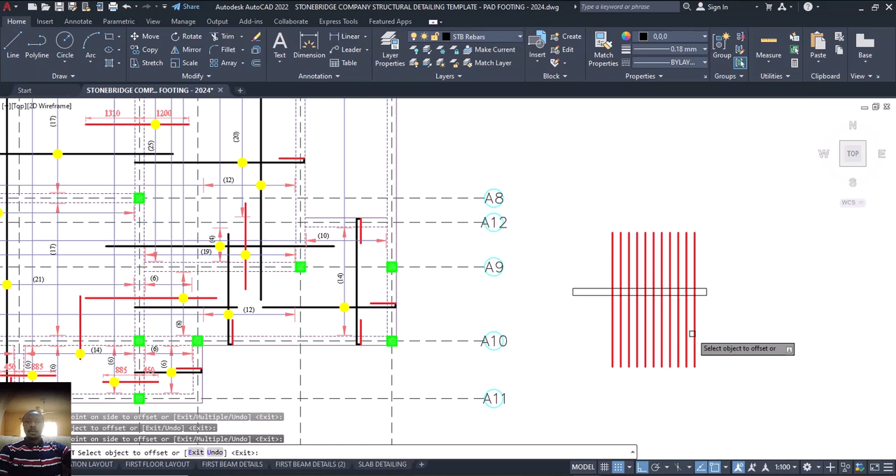200, 200, 200, and so on. Don't forget that in your own case we are starting from the edge. I just want to use this to illustrate the example. So the remaining space, we just adjust this, enter, move it from here and put it here. And likewise here, just copy it and put it at the edge, if that's where our concrete cover is. That's fine.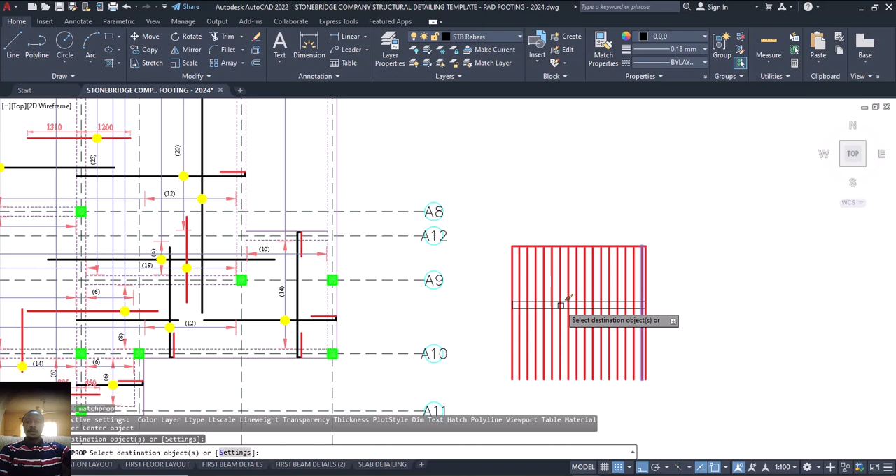So now you can see our T1 at the top of this beam. So what's the role of T2? T2 is going to run from here, L, enter, from this edge here, like this. Are you seeing now? That forms a top mat. So I'll now come to this place. I have my 200 also.

I'm going to have something like this: 200, 200, 200, and so on, and finally, since the remaining one is not up to 200, I'll just copy this one, CP, enter, from this point to this final point. Can you see it now? So this is what's happening on top of this beam.

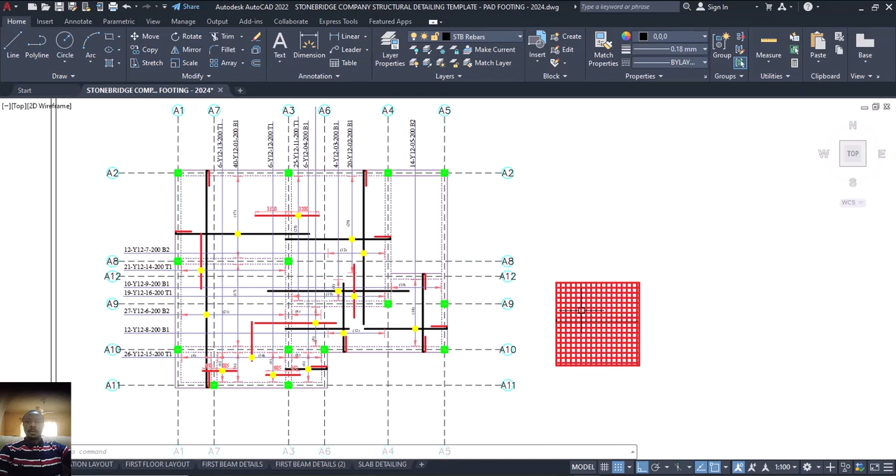But don't forget that at the center here is void. At the center here, there's nothing. This kind of thing is not here. So that's the essence of T2. The last ones I just entered here are the T2s. Is that okay? So I'll now come to this place.

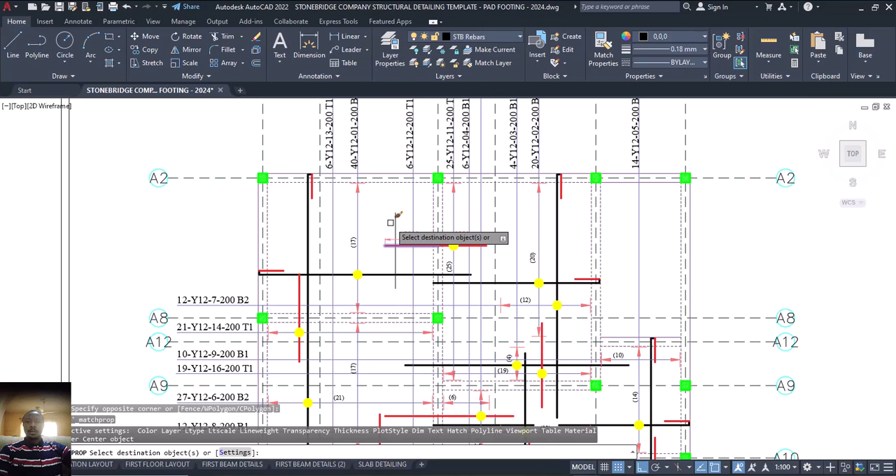Now coming to this particular one, we are talking of T2, isn't it? T2 now. I'm going to choose one. For example, I'm going to use this. I can just put this one L, enter. Then from this point here, I'll just put like this. Okay. Match the property to this. Are we together? To this one now.

So since I have this one, as this one runs like this, you can see the indicator from here. The indicator is showing us what? That this particular reinforcement is running from here to this place, isn't it? So as this one runs from here to this place, this one is going to run along the top like this. So what I'm going to do now, L, enter.

Now from this edge to, okay, now bring out my line, callout line, then this one here, come to this place, then match the property. This time around, let me pick my callout bar, sorry, indicator, CP, enter. This is the final stage. Click on this place, put it on this one here. Okay, then direction, CP, enter.

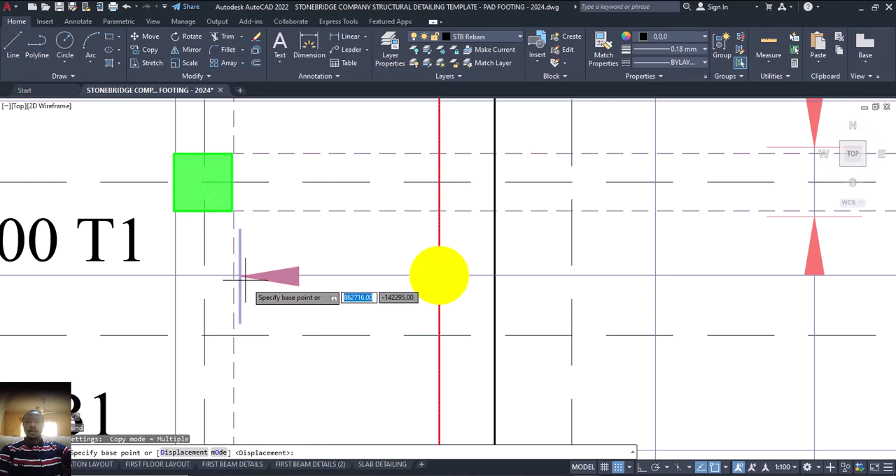Now from this point, let me copy it and come and put it here. Okay, then also let me pick this sample here. CP, enter. Now from this point here, where are we? Okay, we are here. This point, put it here. Then delete this line and delete this line. Can you see it now? It then means that this particular one here, let me shift it away. Enter. Enter.

Okay, it then means that this particular top reinforcement here is running from this edge of this T1 to the end here. Is that okay? So this one now becomes my, let me put this one, CP, enter. Then from this point here to this point here. So I now double click on this one. Then how many of them? Sorry, okay. Let's do the calculation first.

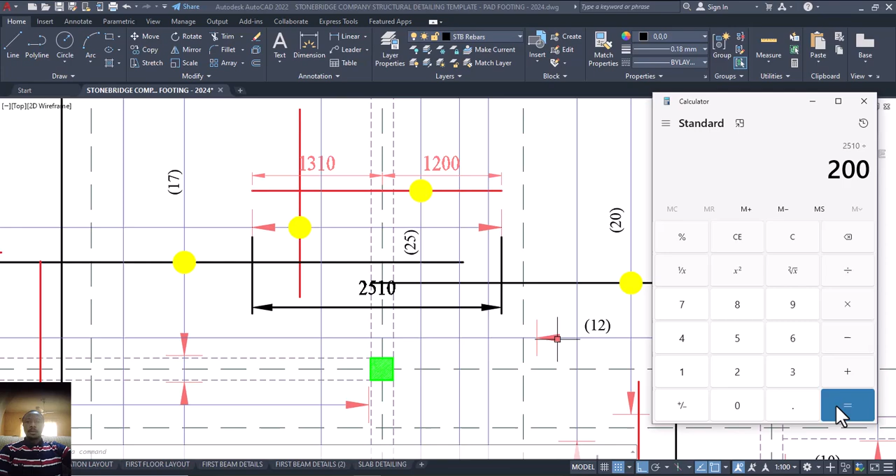Now dimension. This one to this place here. Based on this one now it is 2000 and 510. Then divided by the spacing, which is 200, which is 13. That's 13 number. Then let me delete this. Copy this one, then come here and put it here. Then turn it to 13. So I now come to this place, double click on it. It's 13 number of Y12, number 17.

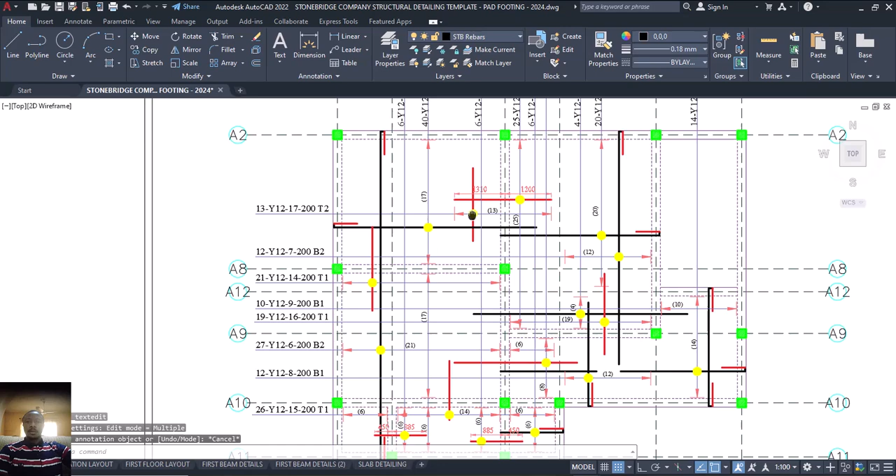Then this time around, not T1 but T2. Can you see it now? So now this is what we have to provide on all of this. I also come to this place, do the same thing, come to this one, do the same thing. Don't forget to always put your dimension. This one also, from this point here, put your dimension. My dimension here, from this point here to this point here, put it here. This is what you do to all, to reduce the length of this video.

So let me just pick this one now. Then I also come and click here and click here. Perfect. So the engineer at site knows that this particular top reinforcement T1 is from the center of the beam into this slab 1570, and the length of this top reinforcement into this particular slab, from the center of this place to this place, is 550. So you also do the same dimension on all of them.

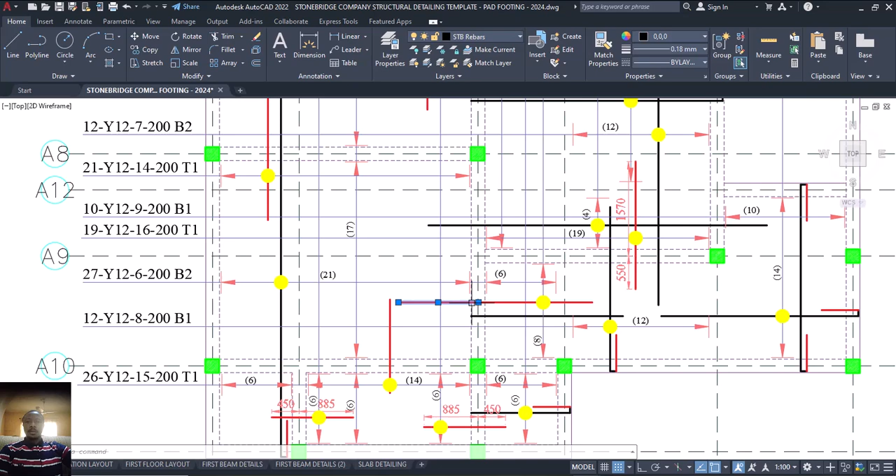Okay, so you can now see our T2. If you can do it for all of them and name them T2, good and fine. But if you don't want to stress yourself, you can just come here and copy. The engineer at site should know; being a professional, you should know. All right. Put it under here, and I'll double click on this one. I'll just say provide T2 to all the T1.

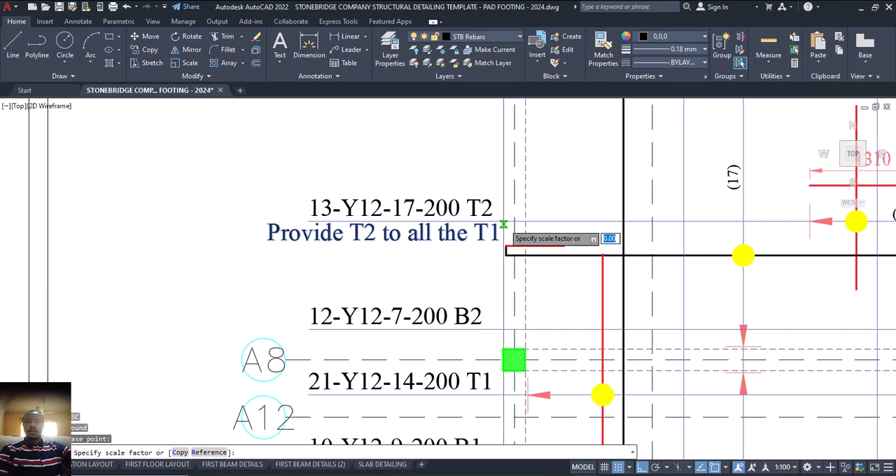Then move it. Okay, all right. Or let me reduce it. If I want to reduce it here, there's scale. Okay, let me put it there, 0.8. Okay, perfect. So you can see it now.

So it then means that anywhere the person sees T1, you should provide T2. So if I look at this T1 now, I'm to provide T2, which is already there, this one now. Then where's the other T1? Let's see. Okay, this is another T1. It then means on this T1 now, I'm going to provide T2. Is that okay? As simple as that, instead of stressing yourself on all of those things. So you can use it now. So this is how to go.

Based on this now, we have successfully detailed the slab of this particular structure, this structure you are seeing here. Can you see it now? So successfully designed. So I'll come to this place now. Can you see it now?

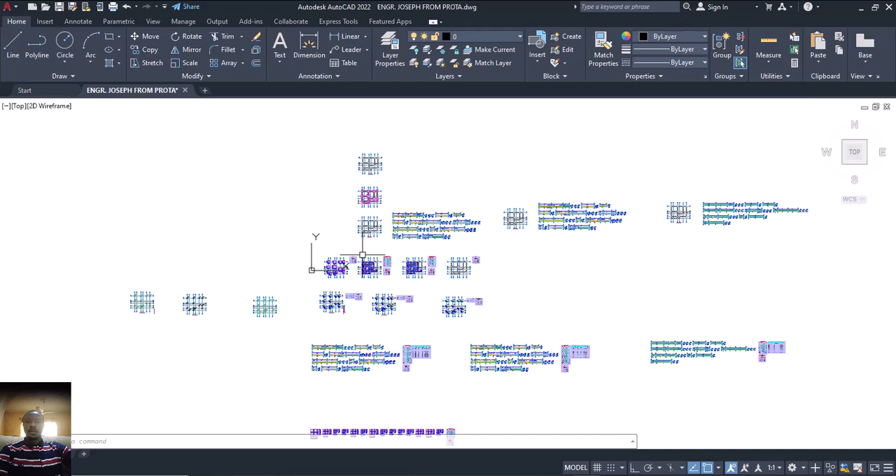This one you are seeing here is what we copied. This is what came from a Prota Structure, which we explained last time in our part 1. So go and watch our part 1 so that you can really know what we have said concerning this particular place. So that is it. Looking at this one now, we have successfully detailed this particular slab. Is that okay? So that is that. Thank you very much.